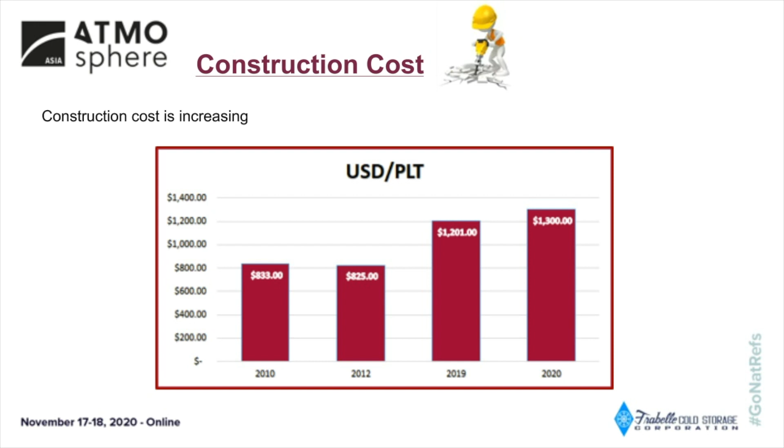Now presenting the current setup of Frabelle, we have now 15,000 metric tons pallet position, and we have 8,000 pallet positions or metric tons of ongoing projects in new construction. By next year, in our pipeline, we have another 7,000 metric tons to be constructed. We also have a 1,000 square meter multi-temp processing area, a 17 tons blast freezer, and 1,000 pallet positions of dry and aircon storage.

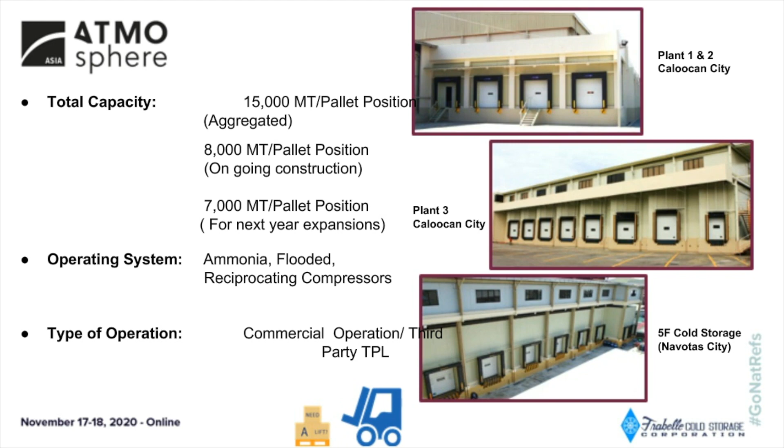Now I'm showing you the mother company. Yes, Frabelle Cold Storage has been in commercial operation for 20 years. But as far as refrigeration is concerned, Frabelle Fishing started as early as the 1960s. Frabelle Fishing is our mother company in international deep sea fishing, operating in Papua New Guinea, Malaysia, Vietnam, China, and South Africa.

Frabelle has 100 boats, big and small, 25 of the fleet with onboard refrigeration systems. 65% is using ammonia, 35% is using Freon. Majority are using reciprocating or piston type compressors, mostly Mycom and Hasegawa. For freezing, we are using brine coil or brine system.

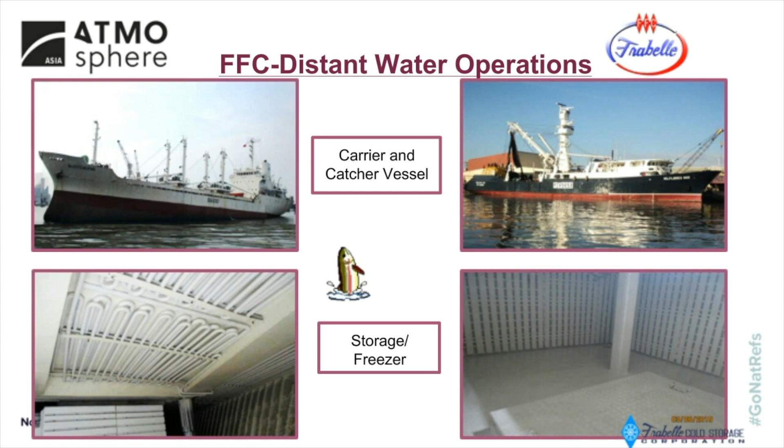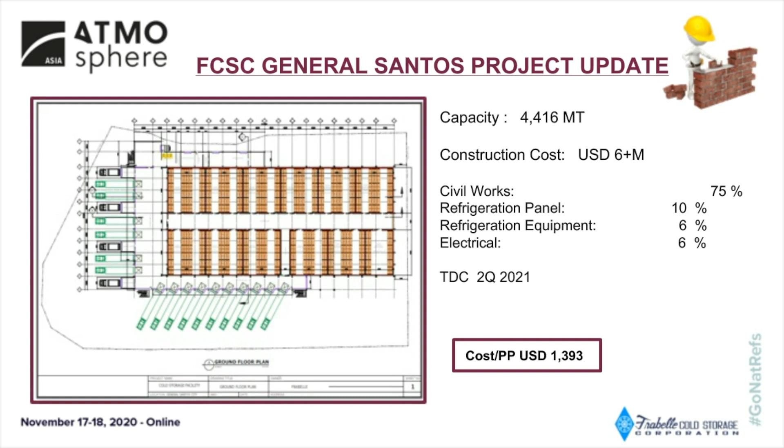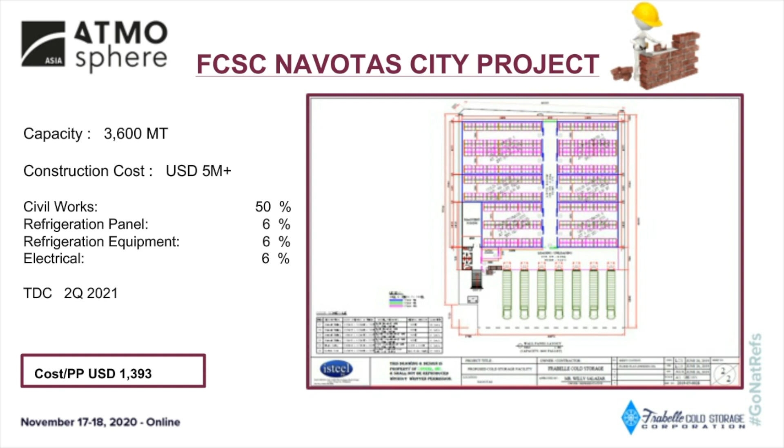As presented earlier, our near completion project in General Santos is at 75% and expected to be completed by early second quarter of 2021. You can see also the construction costs. This is the actual picture. And in Navotas, this is a 4,000 pallet position. Civil works are at 50%. And again, the expected completion is second quarter of 2021. And of course, again, the construction cost you will see on the bottom of the slide.

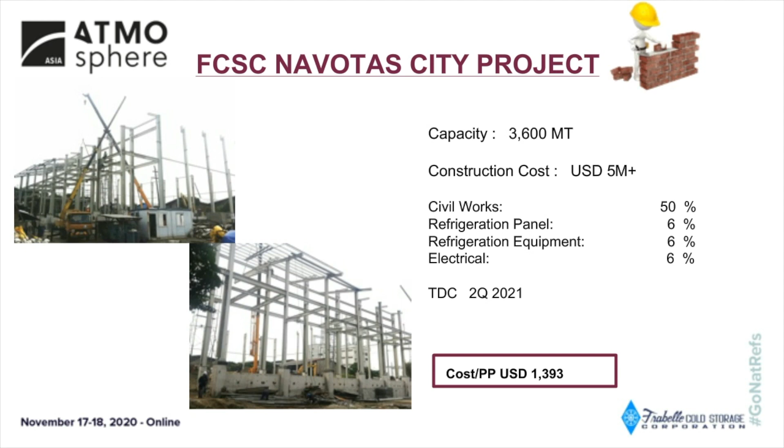We now go to the main topic, which is our situation during the pandemic.

Cold storage as a part of logistics plays an important role in serving and distributing food. In the midst of the community quarantine, fear and risk are there, but logistics and cold storage continue to operate 24/7 to serve the food industry. There's a slowdown in demand from restaurants, hotels, and institutions among our clients because of the closing of groceries, markets and other commercial establishments.

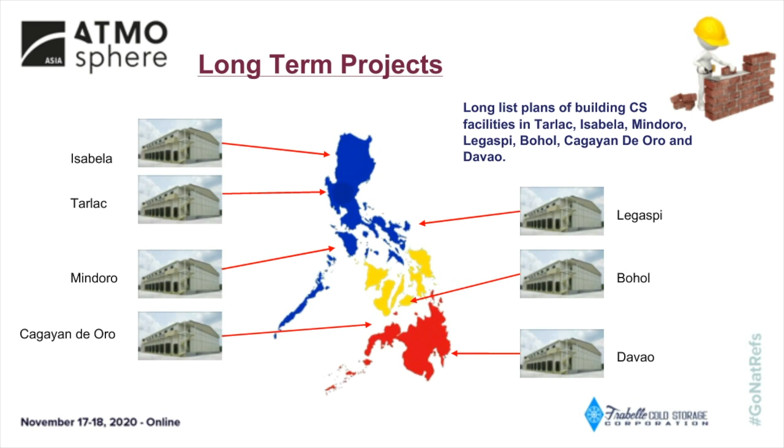Nevertheless, as for Frabelle, we continue to move forward, continue to expand, provide service and commitment. And here are our long-term projects to put cold storages in various regions, hoping to have more interest among contractors and suppliers participating in this conference.